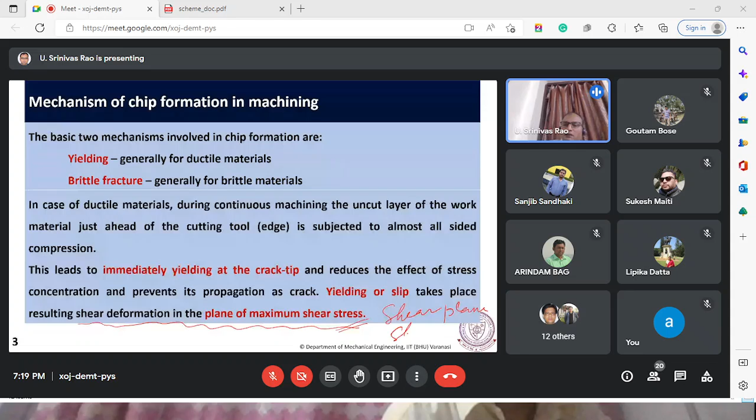Then in case of brittle materials, what happens is material gradually develops a crack which gets initiated before the tool tip, and gradually that crack propagates and it gets separated. This process of swelling, further swelling, and separation goes on repeatedly. In this process, what we get is very small or discontinuous chips. This is the way brittle materials are machined, and we get the material removed in terms of chip.

Then what is the problem with that? When the discontinuous chips are forming, during breaking there is vibration generated, so it may give rise to very rough surface. Another issue is that because these materials are very hard, we always need still harder tool materials.

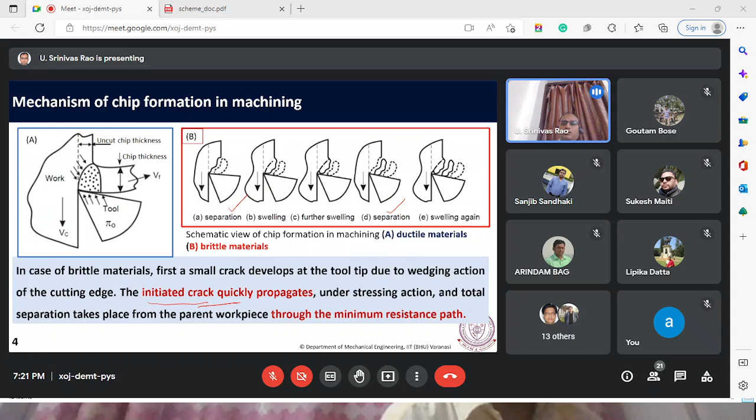Now, to what extent can we go for harder tool materials? Affording tool materials to satisfy the requirements of cutting brittle materials means we need tool materials which can withstand high cutting temperature, so we need very high hot hardness and hot strength. Apart from this, it should withstand thermal shocks, and there should not be any built-up edge formation when we go for lower velocities to control cutting temperature, so as to restrict rapid tool wear and reduced tool life.

We need to go for high-end cutting tools, maybe CBN or diamond, which is not always economically viable. So we cannot go for these cutting tools in every case. In some cases, ceramics themselves are very hard—their hardness is comparable to normal cutting tools like tungsten carbide, cobalt, cemented carbides—so with that kind of hardness, we may not afford to cut at all using these traditional processes.

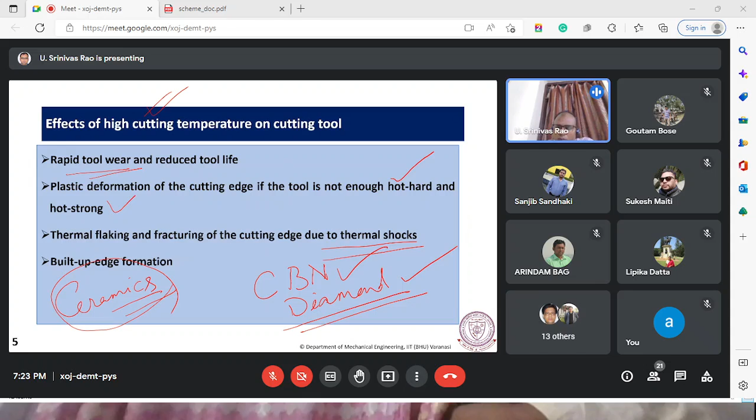So normally what is done is we have to choose certain cutting tools and a certain cutting process to achieve material removal successfully. Before going into that, another fundamental aspect I want to share—these are all textbook material, not very new, but compiled long back. So what are the possible ways of improving machinability of work materials?

One way is to change favorably the composition, microstructure, and mechanical properties using certain additives or heat treatment. Normally through heat treatment such as annealing, we try to soften the material so the cutting process can be easier, or we add certain additives on the surface of the material so material removal becomes easier.

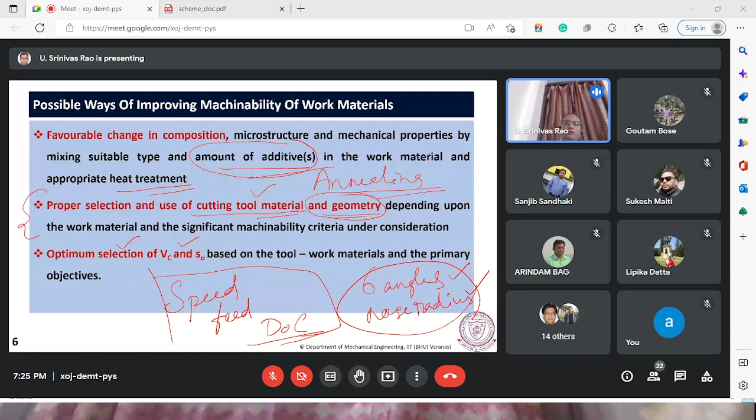Another way is proper selection and use of cutting tool material and cutting tool geometry—this is a vast area of machinability research where we optimize speed and depth of cut for any combination of workpiece and tool. Cutting tool geometry is specified by 6 angles and nose radius, and all these parameters affect cutting in different ways. So optimizing these angles, nose radius, speed, feed, and depth of cut is one way to optimize the cutting process.

Then another method is the appropriate application of cutting fluid—choosing the right cutting fluid. For example, in machining titanium with cemented carbide, if you go for dry cutting, the tool gets worn out very quickly, but if you use certain cutting fluids, the tool life gets increased.

So this is another way. When we say application of cutting fluid, that includes choosing a cutting fluid, then applying that in different ways suitably. There are many ways devised for application of cutting fluid, and these things are continuously getting improved, with proper selection and application of some special techniques. This is an ever increasing methodology.

This gives innovative ideas. Some are already established, in the sense we can use these things in different ways for different applications, like dynamic machining, where we use certain kinds of vibrations. We can vary the wavelengths and frequencies of the vibrations applied, whether continuous or pulsing, and some changes can be implemented there.

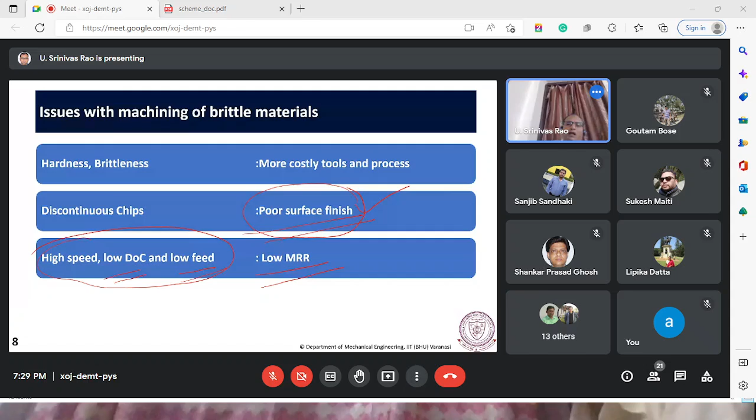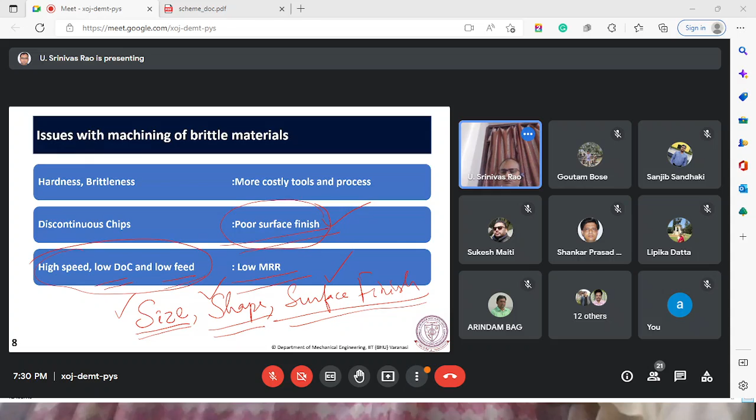And when we specify what the component requires, it's size accuracy, shape accuracy in terms of geometrical accuracies, size accuracies in terms of stringent dimensional tolerances, then surface finish. These things are to be achieved; only then will the utility or economic value of the component be high. So that gives the motivation for our work.

Now, traditionally, what are the methods followed for machining brittle materials? Normally, abrasive methods are taken. In abrasive methods, we have grinding, honing, lapping, and polishing—these are loose abrasive processes.

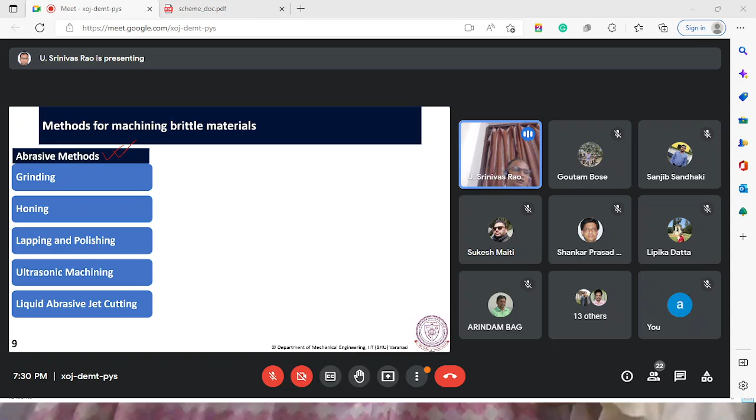Then ultrasonic machining, but this is basically vibration assisted machining. Then liquid abrasive jet cutting. Then non-abrasive methods, like unconventional machining processes: electrical discharge machining, laser beam cutting, electron beam and ion beam cutting, friction cutting, microwave cutting.

Then this is what our interest is: ductile regime machining. This is a non-abrasive method, similar to normal machining or macro machining—only with controlled depth of cut and feed speed. Then there are combined abrasive and non-abrasive machining processes, which we can call hybrid machining processes. This list is not exhaustive; in fact all these lists are not exhaustive, and you can add many more processes to this.

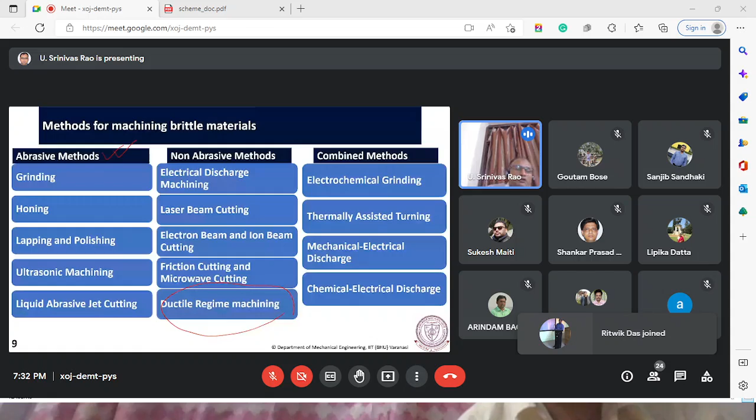Now, what are the basic problems that lead us to this? In all these processes listed here—grinding, honing, etc., whether edge grinding, finishing, lapping, or polishing—we encounter some micro cracks and subsurface damage in the final output. Though we remove material, the component obtained will have some micro cracks and subsurface damages, which is not very desirable. So there is always a need to avoid this.

This gives an alternative method. Ductile regime machining is an alternative method for machining brittle materials to obtain—so we have to avoid that—crack free surface finish, through a ductile and plastic material removal process. If we go for brittle material machining in the ductile regime, we may end up with crack-free surface finish, which is the desirable output.

Crack-free, high-quality surfaces—we should develop some. Till now, these ceramics, it is a challenge to give shape to them.

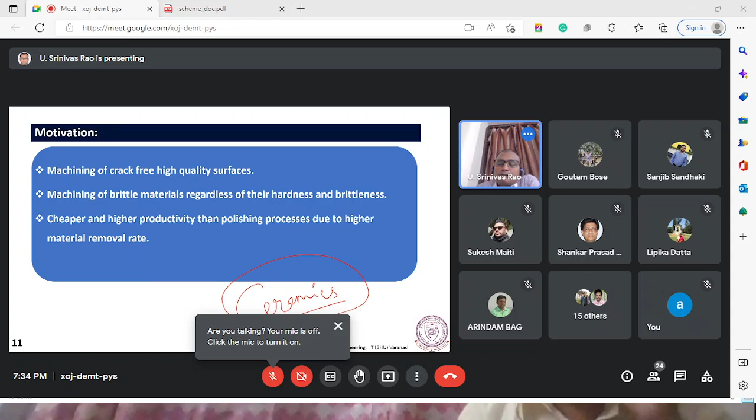So, machining brittle materials regardless of their hardness and brittleness—this is some feasibility or enhancement of feasibility. Then another economic aspect: cheaper and higher productivity than polishing processes.

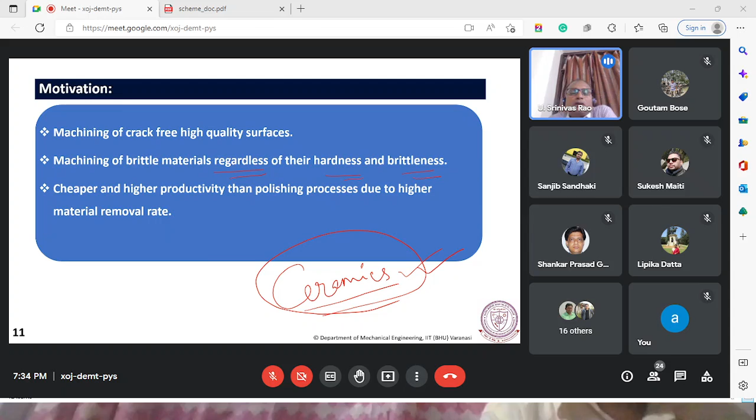Whenever bulk machining is not possible, what we go for is grinding or some polishing process through loose abrasives to try to remove certain material. In these cases, the material removal rates are very small. So we need to increase the material removal rates and achieve higher productivity, thereby ending up with cheaper products.

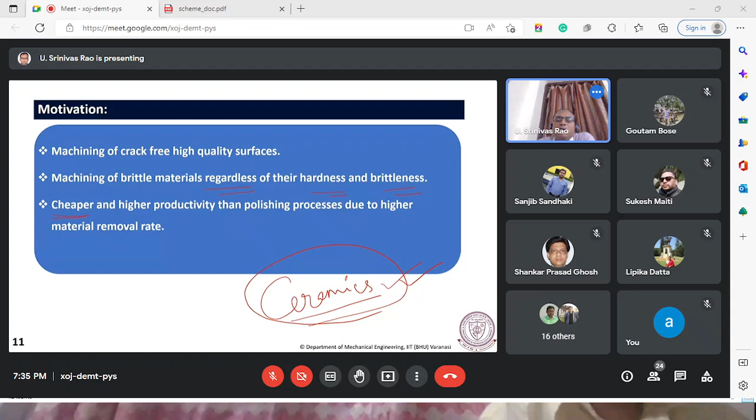How is this possible for a brittle material? The main reason it is feasible is that all brittle materials have a small deformation during machining. This can be highlighted through the stress strain curve. Brittle material is characterized by sudden failure without having deformation, but that does not mean zero deformation. There is a small element of deformation present.

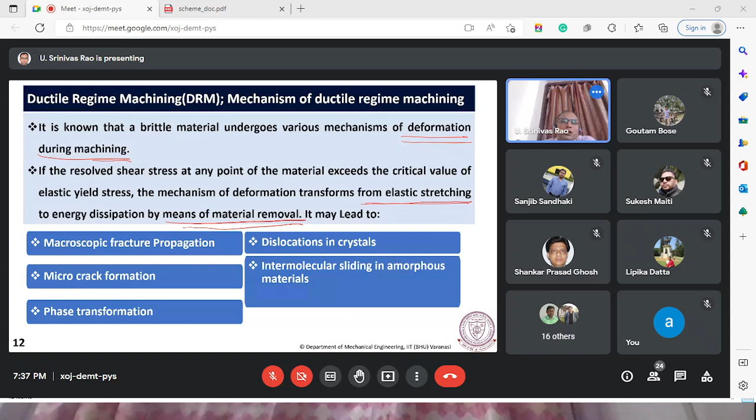If the resolved shear stress at any point of the material exceeds the critical value of elastic yield stress, the mechanism of deformation transforms from elastic stretching to energy dissipation by means of material removal. Through this, we can achieve macroscopic fracture propagation, micro crack formation, phase transformation, dislocations in crystals, and intermolecular sliding in amorphous materials. These give a window of opportunity to have some deformation in machining that we can explore.

Regarding energy dissipated in machining of brittle materials: in the total energy consumed to produce that small chip, a small fraction of energy is dissipated or used in ductile regime machining due to plastic deformation, while the bulk of the material is removed through brittle fracture. Both are happening—one taking place along the slip plane, and another along the cleavage plane through propagation of the microcrack.

This gives further information related to the size effect. Size effect is the non-linear increase in energy consumption when we reduce the depth of cut. So how does that affect this process?

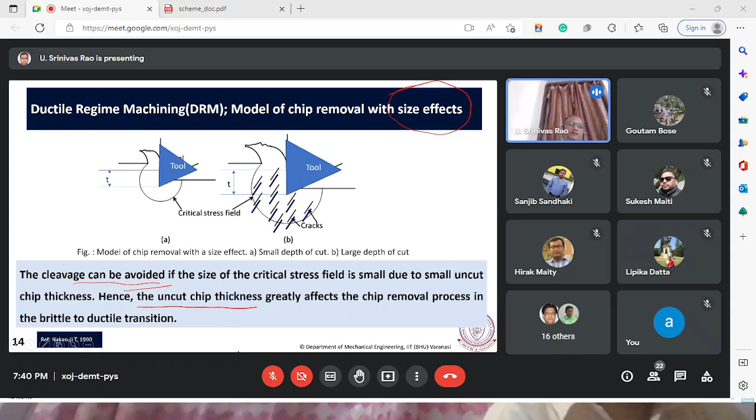In slot milling, the chip thickness is not uniform—it varies from 0 to maximum. Whether it's end milling, down milling, or up milling, the chip thickness is not uniform in any of these cases. So when we have non-uniform chip thickness, some part of the uncut chip thickness is less than what is required for material removal. When this condition is satisfied, there will be only rubbing action, and no chip will be removed.

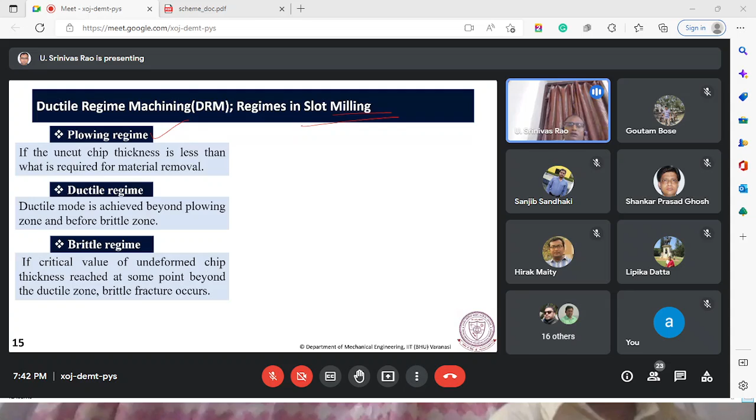Then in this next zone, the chip thickness is more than in the plowing zone, but it still only has plastic deformation and shear—that is known as the ductile regime. Further increasing, chip formation takes place through the brittle zone. As we know, in milling there is variation of the chip thickness, and we have all three zones. If we restrict ourselves to the ductile zone only, we can produce a surface without any micro cracks.

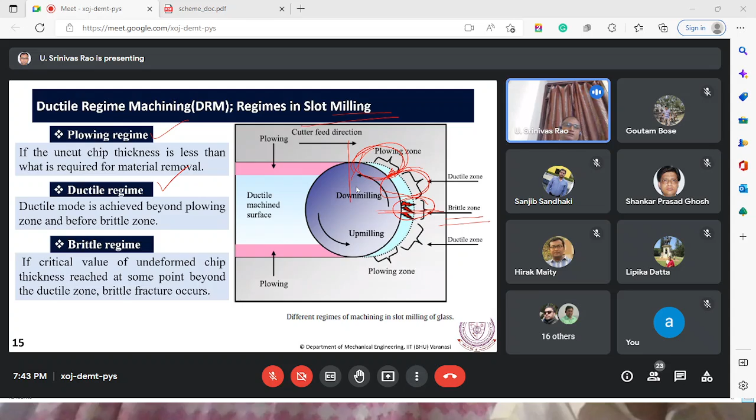This further explains the case of up milling, where chip thickness goes from 0 to maximum. In this zone, no cracks are formed; in this other zone, cracks are formed. If the radial depth of cut is further increased, the machined surface will also have cracks. So we need to keep the uncut chip thickness below some critical value, otherwise brittle fracture will happen.

So if we can keep the brittle fracture point far from the level of final machine surface, then with low feed rate, no brittle fracture will occur and we can avoid these micro cracks on the surface. Surface gets formed, but it is having micro cracks on the surface.

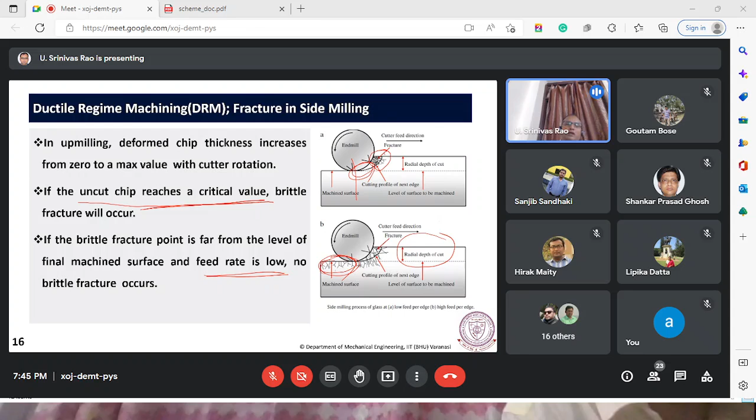So some literature gives inputs to this. Plastic flow happens as a more energetically favorable material removal process than fracture at lower depths of cut. If the size of the critical stress field is small due to the small uncut chip thickness, the cleavage can be prevented. So in all these cases, the highlighted point is that we need to control the critical stress field through small uncut chip thickness.

Another literature reference also gives the same image. Chip formation takes place in a ductile manner if the depth of cut is small enough. So these things can be checked through scratch tests and indentation tests, like we normally do indentation for finding out hardness. That gives an idea about up to what point the micro cracks are not generated.

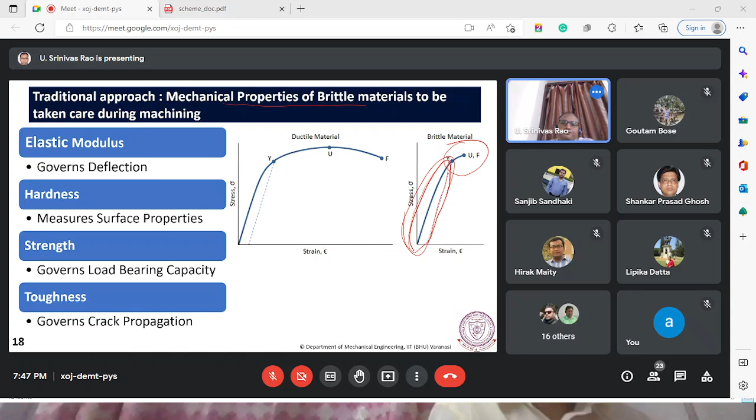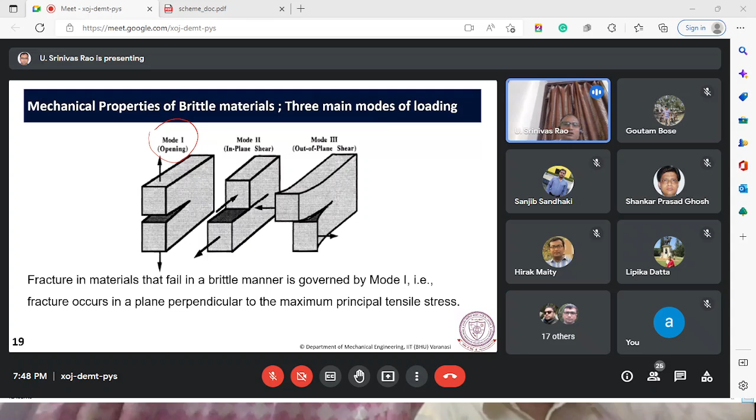Now, gradually, what we need to obtain, the final aim, is to obtain a crack free surface. For that, we need to check when that crack forms. The hardness indentation is the starting point. So when we have different levels of indentation, normally there is a plastic zone. When you further increase, radial cracks are there.

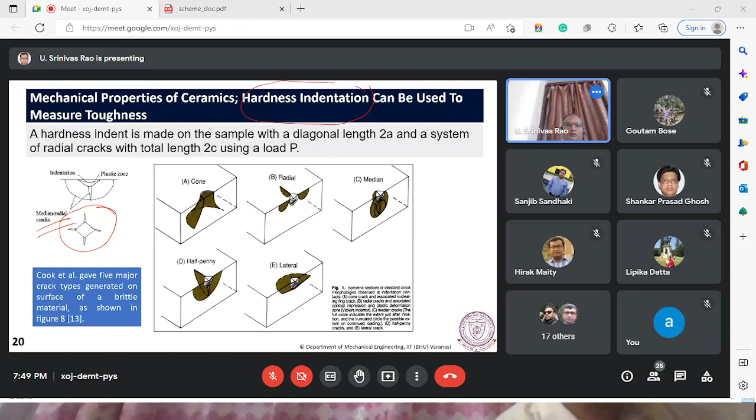Through this experimentation, there is a model developed now for critical depth of cut. Normally indentation is done for hardness tests, so based on the shape of the indenter, we have the hardness value calculated.

That can be used to find out the critical stress, and fracture toughness we find, which has a zeta value given. These are all empirically obtained, and from this there is a calculation for the model developed for critical depth of cut, which is related in terms of elasticity of the material, hardness of the material, and fracture toughness of the material.

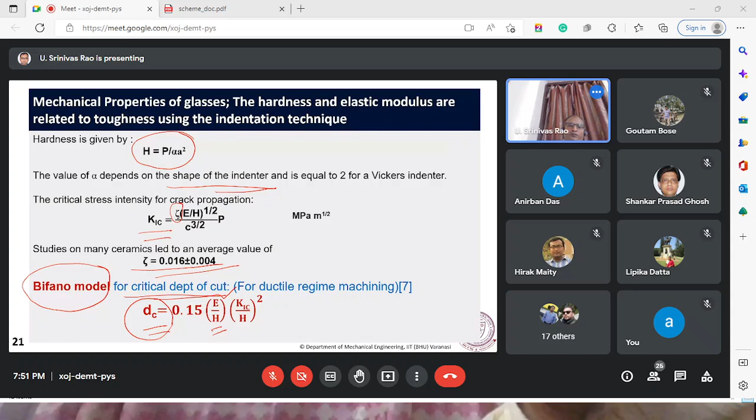So through elasticity, that is Young's elastic modulus, hardness, and fracture toughness, these are all material properties. Through these material properties, we can arrive at the critical depth of cut. Now, this critical depth of cut is a very small value.

These things have been observed and checked in different processes. One such process is ductile regime grinding. In this, based on the machine configuration, stiffness, and other details, the critical value, how small it is, has to be obtained. We are not going into the details of these investigations, but they are available in literature.

So the basic hypothesis in whatever we have discussed is that regardless of the hardness or brittleness, there is a small element of transition between brittle machining regime to ductile regime. If we can control that, if we make the grinding in-feed rate small enough, then we can achieve ductile regime machining, and the main advantage is that the percentage of surface fracture obtained is very less.

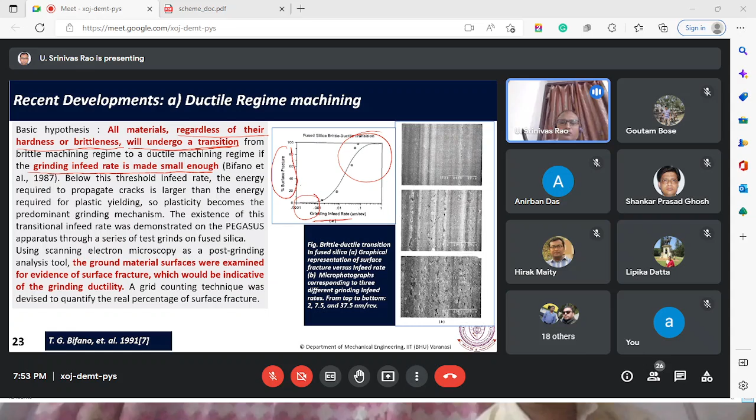Similarly, some other investigations have been done. In all these cases, the calculated indentation depth is related to the fracture propagation criteria, and through that the critical depth is obtained. This again, he has done pioneering work in this area. Way back in 1991, he investigated a lot into ductile regime machining and developed that model, famously known as the Bifano model, which gives an estimation of critical depth of cut.

So we have these parameters. Along with that, some constants are required.

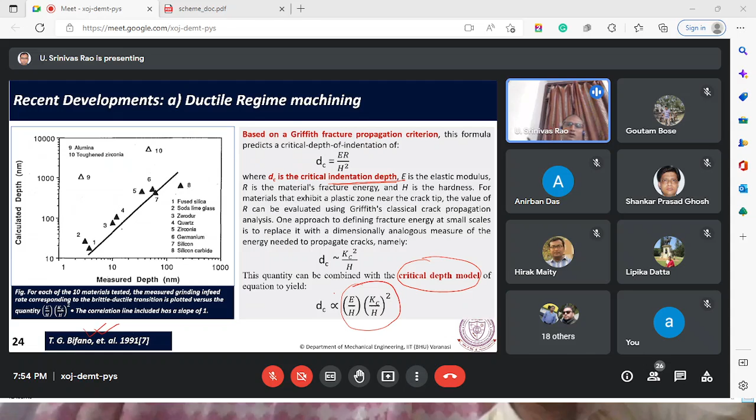From this work, what we have obtained is there is a possibility of ductile regime machining, and to achieve that, what we require is to know the critical depth of cut. If we can go for machining at critical grinding in-feed rate below that, then we will achieve ductile regime machining. So first knowing this is important, then keeping the depth of cut below this.

Now the issue is this value is very small. If the critical depth of cut is very small, then naturally the MRR will be small. So the next thought is how can we increase it, how to determine it experimentally. These two are basic challenges. Then, can it be increased further? This is the big question.

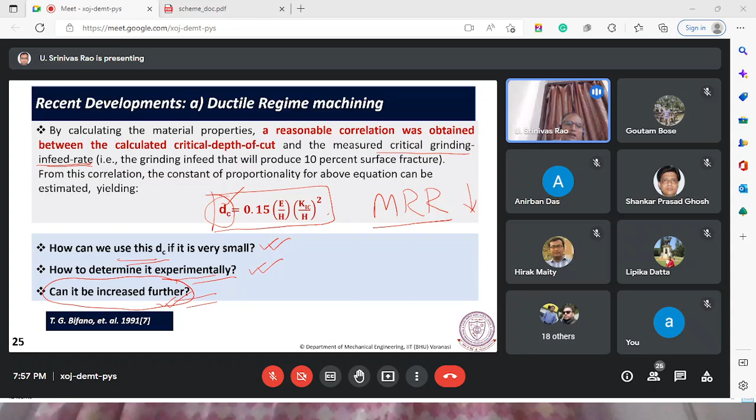In fact, we at IIT BHU had a small attempt to do this. We used this knowledge and tried to increase it further. The basic idea is not very big: we know that when we increase the temperature of any material, its ductile behavior range increases. So we wanted to investigate into that, and it has been done by other researchers in different ways.

To determine the value of this critical depth, we have used scratch tests of brittle materials as well as indentation tests. In the scratch test, the width and depth of the scratch give an estimation of the critical depth, or in a way give the threshold value of brittle-ductile transition. So these nano scratch techniques are important.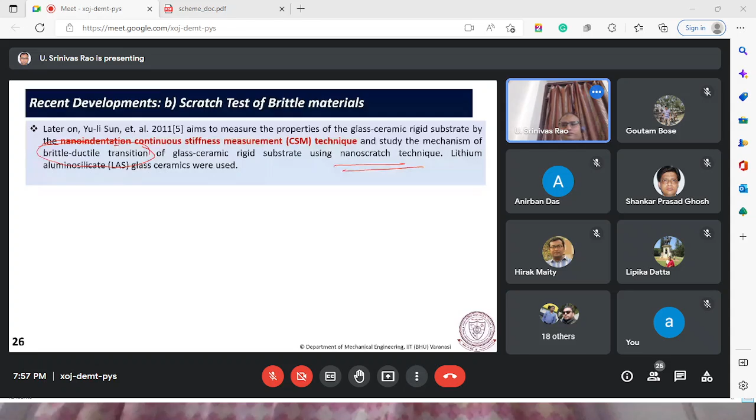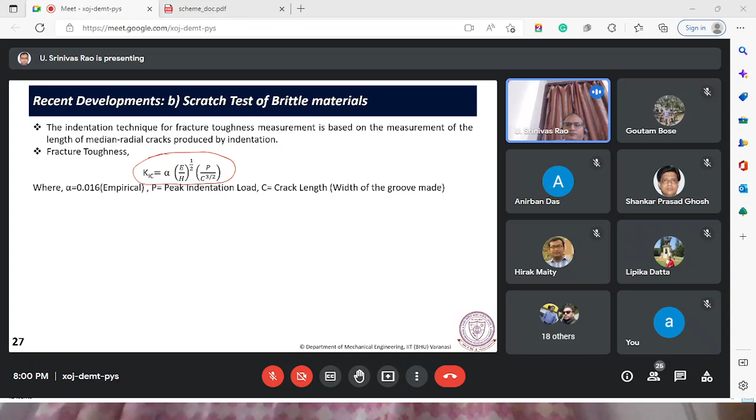Here you can see, when we have a gradual increasing load, this is what the test shows in detail. It shows a scratch test in which the normal load is gradually increased. Between 0 to 26, you can see the surface is totally smooth, no scratch is shown. Then scratch starts forming, but there are no lateral cracks. Then in stage 3, you have a lot of lateral cracks.

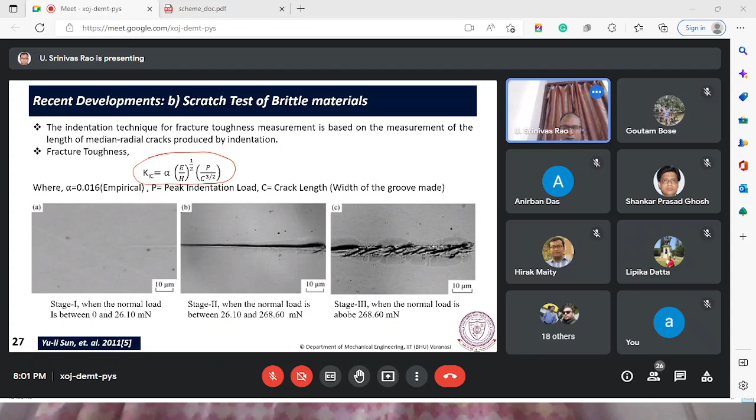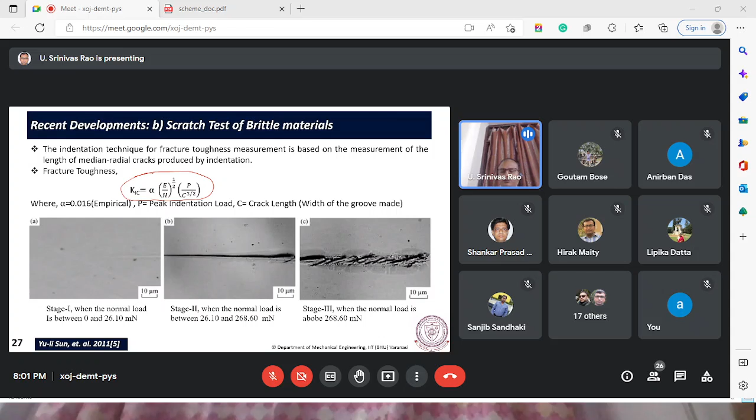From this, we can find out the transition phase where the formation of lateral cracks marks the brittle-ductile transition. Initially, it is ductile mode, then when the load is further increased, it goes to brittle. So from there, we find out the critical depth information and the fracture toughness at that load.

And then when the ductile and brittle transition happens, a lot of cracks occur, and that makes the scratch depth also fluctuate.

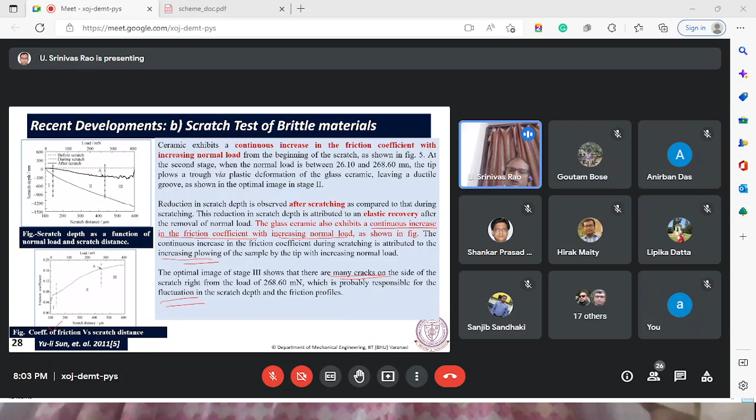So through all this experimentation for different materials, this critical indentation depth, DC, is found. It's being done continuously. From those things, as already mentioned, Bifano formulated this, and in that formula, the constant is material specific, so it has to be obtained through experimentation only. The experimentation may be grinding test, indentation test, or scratch test. These are different tests to get the critical depth of cut.

I think we will continue without a break, or do you want a break? It's up to you whether you want to continue. If you take a break, the flow will be broken, so we can continue, no issue.

So the basic thing we have seen till now is that we can go for indentation test, scratch test, or some machining test, or controlled machining such as grinding, which can be taken as a test. From there we need to find out this empirical constant of the formula, and then the next question is how to increase that.

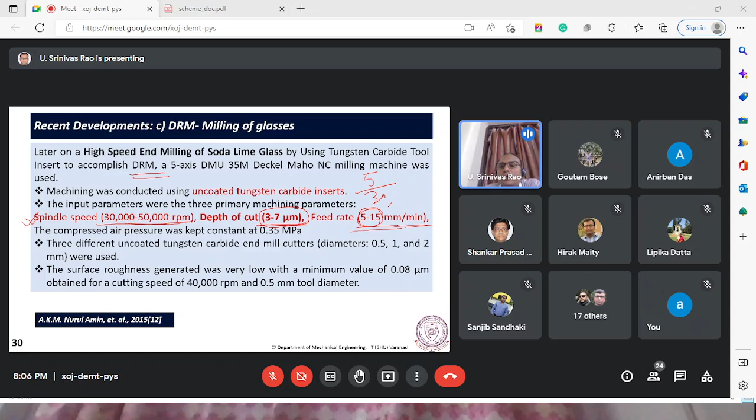The feed rate is 5 to 15 per minute. This looks like a big value, but if you take 5 by 30,000, that gives the feed per revolution, which is almost 10 to the power minus 4, a small value -- about 0.1 micrometer per revolution. These values give an idea about the challenge: we are dealing with very small depth of cut and very small feed, which actually motivates increasing it.

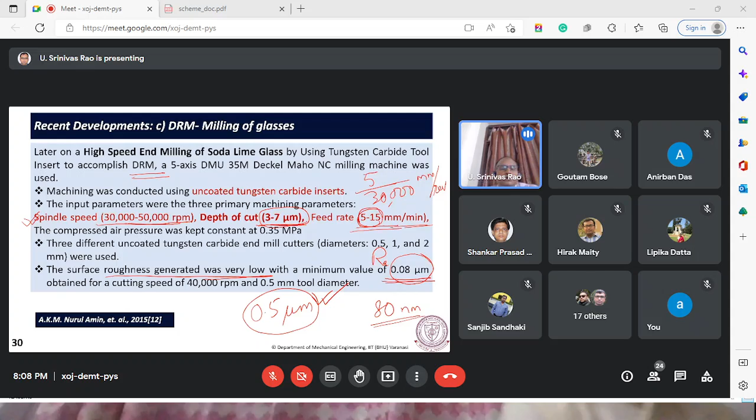However, with this approach, the surface roughness generated is very low, with a minimum of 0.08 micrometer RA, which is basically 80 nanometer. In normal precision machining, such as turning, around 0.5 to 1 micrometer is considered very good roughness for macro machining, so this is smoother than that -- the glass surface generated is quite smooth. But with these parameters of depth of cut and feed, the material removal rate will be very low.

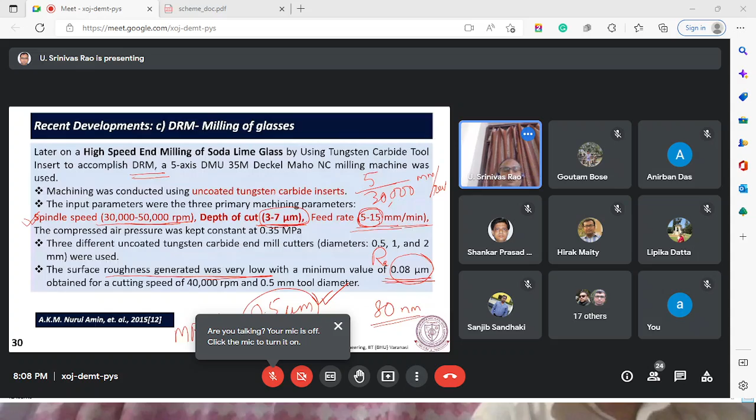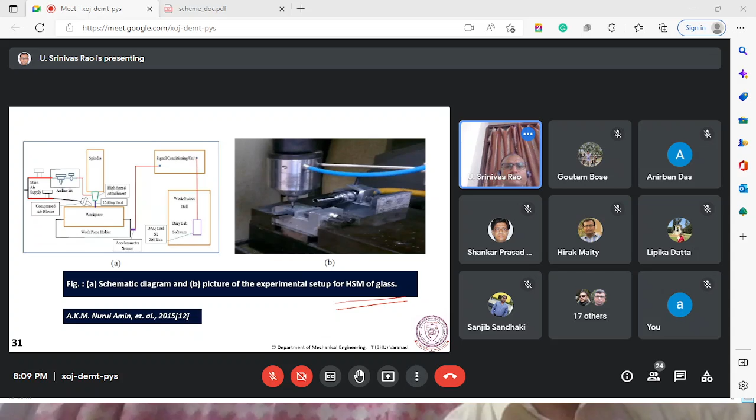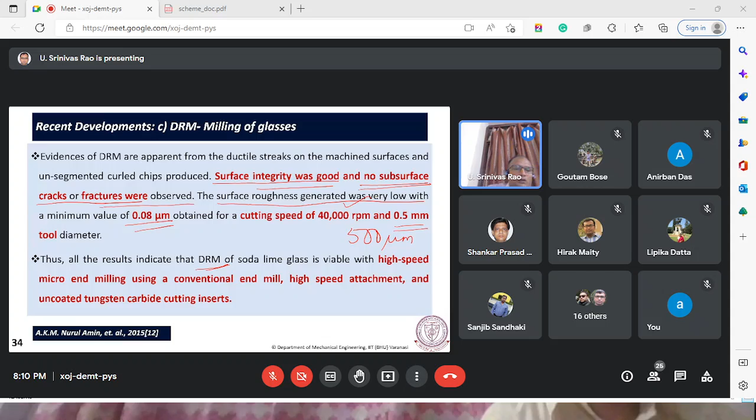We'll skip some part of this and go to other details -- these are some details of the experimentation showing how they arrived at the conclusions. What they achieved is that surface integrity was good, with no subsurface cracks or fractures, and surface roughness generated was very low, minimum 0.08 micrometer, at this cutting speed with a 0.5 millimeter, that is 500 micrometer, tool diameter end mill. So it is possible to cut soda lime glass in ductile regime machining at these conditions with normal uncoated tungsten carbide cutting inserts. This is the conclusion of this experimentation.

There is a motivation to increase this critical depth of cut. In that direction, experimentation has been done on temperature versus hardness of the glass.

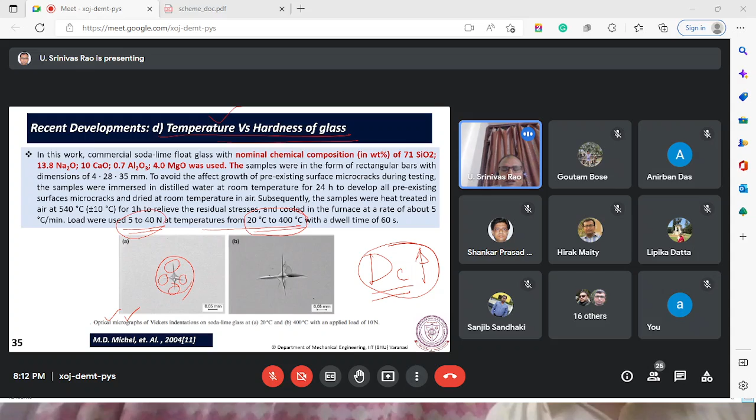The hardness is checked using different loads at different temperatures. It isn't very complex: you increase the load and the temperature with these combinations, and check when the crack forms. After indentation, we check through optical micrographs whether these median cracks are formed or not, and at what load and temperature they are not formed. That gives information about the critical depth of cut.

When you increase the load, crack length increases, which is of course quite obvious. And with increasing temperature, at different loads, the crack length growth is more.

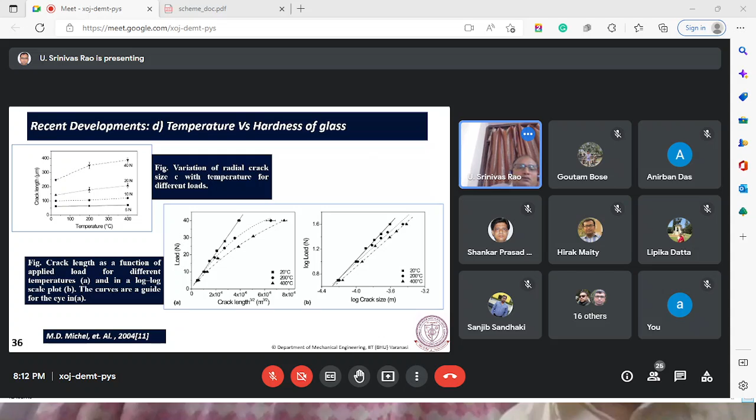From these extensive experiments, the conclusions are of course obvious, but we need to find out the nature of the change, at what rate the hardness decreases as temperature increases. Through these Vickers indentation experiments, it has been observed that hardness decreases as temperature increases, and the radial crack length measured at the surface increased with temperature.

These experiments give an idea that if we can increase the temperature of the specimen, there is a possibility of improvement, because the E by H ratio is important for the depth of cut. In the Bifano model, we have one term which is E by H. So if H reduces, the depth of cut will increase. That is the effort.

At the same time, E should not reduce too much. If H is reducing, E will also reduce to some extent, but both should not reduce at the same rate. So what we should finally end up with is a higher E by H.

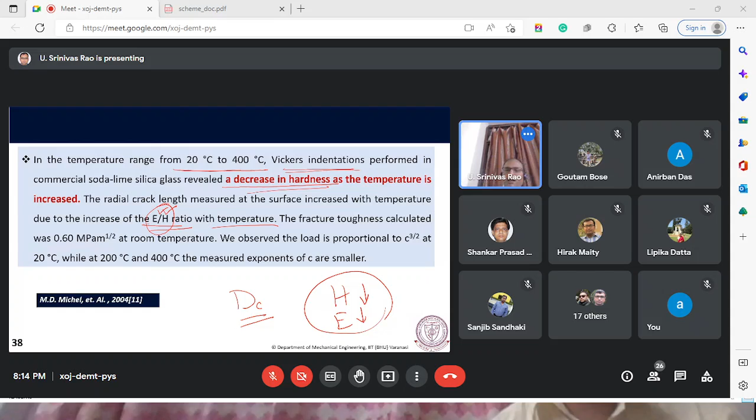With these inputs, people have tried laser assisted machining. This is also a well known domain. To increase material removal rates and improve surface roughness, people have adopted this approach, which can be extended to brittle materials as well, through local heating.

Through this laser heating source, the small area in front of the tool is heated. Because of that reduction in hardness, material removal becomes easier. In this process, we have some heat affected zone, and after machining is over, some heat treatment can be done to improve the material properties.

But there are certain problems with this as well. These are certain characteristics of laser assisted machining: the parameters are laser beam power intensity, spot size, beam distribution, and scanning velocity. Based on this, the localized laser effects matter, and the major effect is thermal stress gradients.

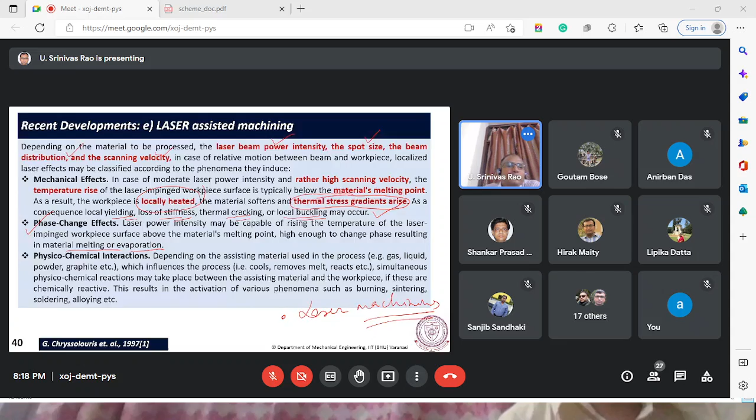Keeping these challenges in mind, these methods increase the process efficiency for materials which are difficult to cut compared to conventional methods. These LAM methods are now established. For materials known as difficult to cut, laser assisted turning, milling, drilling, grinding, etc., have been undertaken.

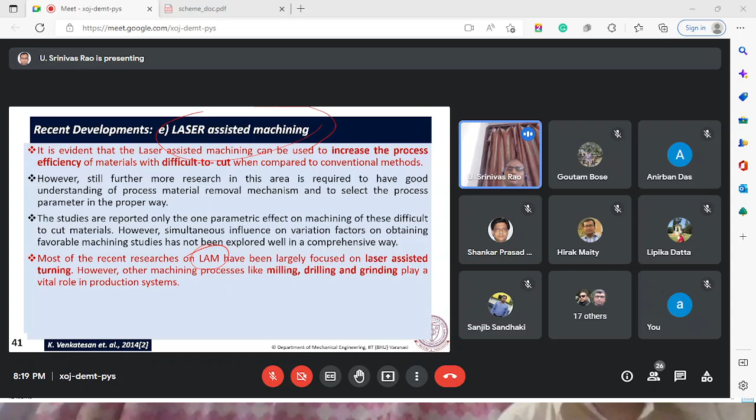However, there are some issues, as we have pointed out. Local heating creates a non-uniform heat affected zone, and then high thermal stresses. This happens if you are using a single point cutting tool, so the area in front of the tool may be heated in a better way.

But with these issues in mind, what we have thought is let us try bulk heating. In case of bulk heating, the total material property, temperature, is getting increased, and the thermal gradient is very less. So when the thermal temperature gradient is less, the thermal stresses will be minimum. This may be suitable for all machining processes.

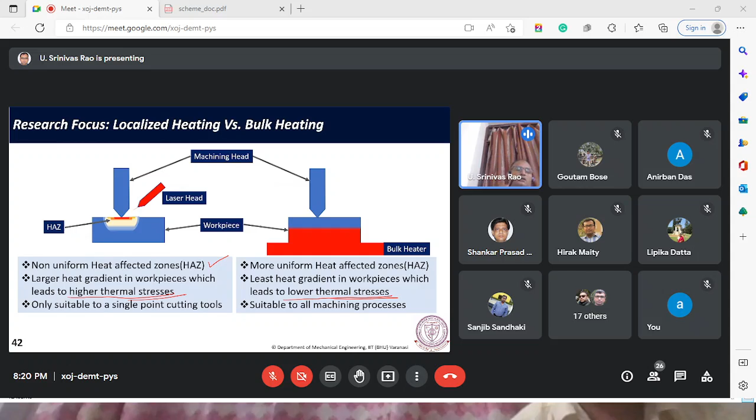So this gives the main motivation, or research interest, that the heating of ceramic samples can lead to better ductility so as to achieve better machinability. This gives some idea about increasing the critical depth of cut. There is a possibility that bulk heating of the samples can be a better option than localized heating by means of laser sources, to reduce the thermal gradients.

With this idea, we need to check the machining work on glasses, which are mostly subjected to grinding and polishing, which are very slow processes. If this machining process is successful, we can go for glass machining instead of grinding and polishing, which is being done nowadays. With that in mind, we have chosen bioglass as the candidate material for some investigations.

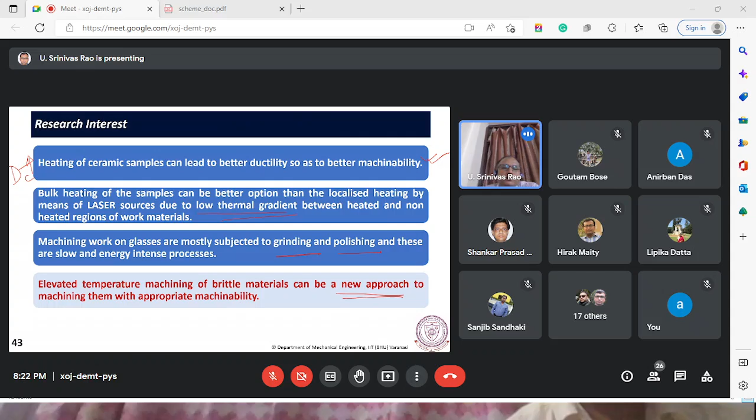So this is a new approach, elevated temperature with bulk heating. Some effort has been put at IIT BHU, where one PhD scholar has worked in this area. Before going into that, some little information about the sample preparation of bioglass.

This indicates the material composition which is taken, and to keep all the specimens of uniform composition, the total material is prepared at once, so it goes through mixing of the powders. Then it is divided into some batch size, kept in an alumina crucible, then charged in a high temperature electric furnace, and held at 1400 degrees centigrade for 2 hours.

After this we obtain the glass, and that molten glass has to be cast into plates, through some molding. So through this, glass specimens have been prepared, which will be used for different experimentation.

So these are some details of the glass formation and how the glass property can be changed through annealing.

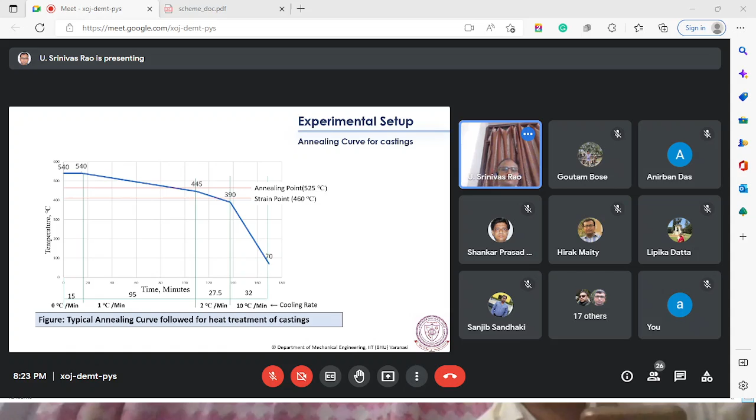As I told, bulk heating and then doing some experiments to obtain the critical depth. So a portable heating setup has been developed, and using that heating setup, it is loaded onto a scratch tester on which the specimen is mounted.

Then the effect of the traction force and scratch speed at different temperatures are checked, and from there we found the brittle ductile transition and critical depth of cut. Further, optimization of that we have done. I will give some idea about these things.

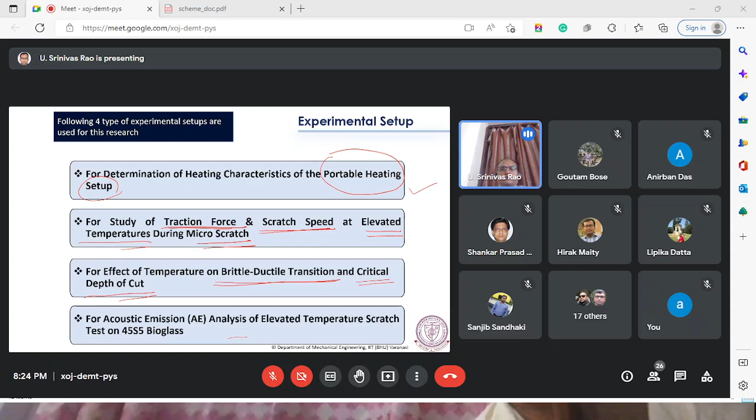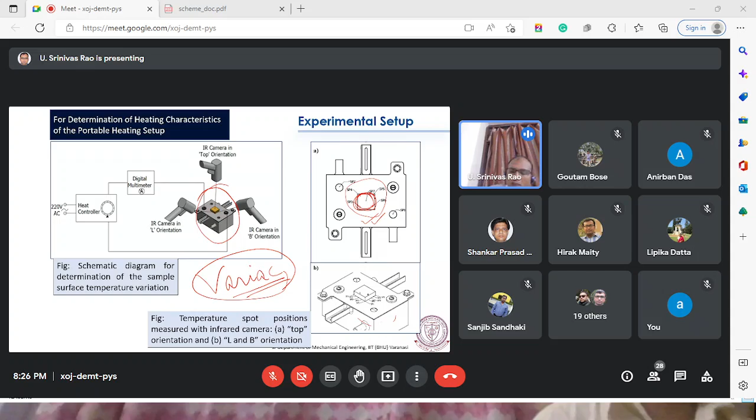...there is a water jacket. This is a double walled housing, so in that there is a water jacket, water can be flown in that to maintain the temperature constant. Then to obtain different temperatures, the heating rate is controlled through using a variac, so we can control the power supply through the variac, and from there we obtain the desired settings. These things are carefully designed, and the characteristics of the heating elements are obtained.

Then that is mounted on this, and the scratch testing is done, and from there we get, through the load sensor, the load variation. In fact we take ramp loading.

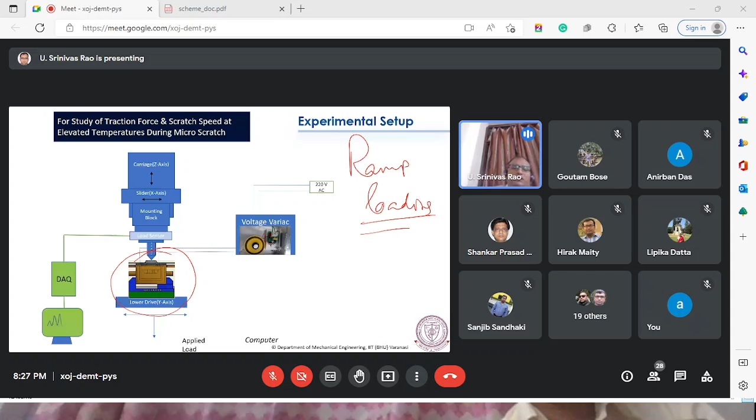Basically we gradually increase the loading, and we check the characteristics through the acoustic emission signal. Acoustic emission is basically the vibrations generated through elastic emission whenever some material is undergoing deformation, it emits elastic waves, which are captured through this acoustic emission sensor.

So in this specimen, some coolant is flown. Basically, water is flown through that to keep the temperature uniform.

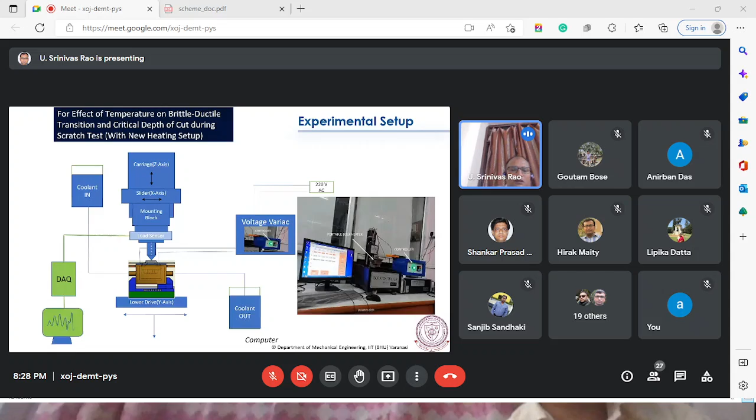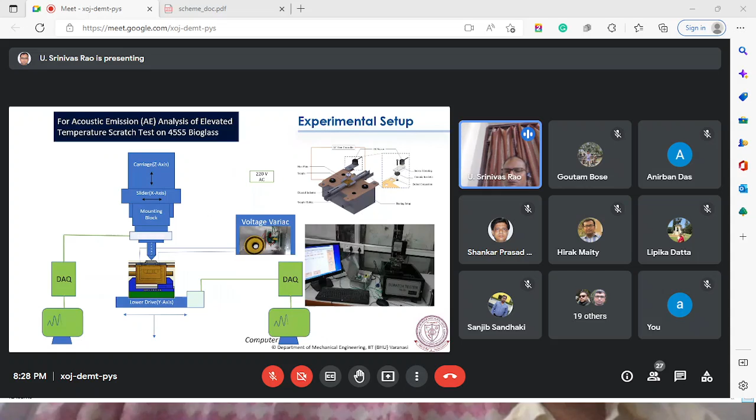The different experimental conditions are shown here, so we need not go into it. Now some details about the heating setup.

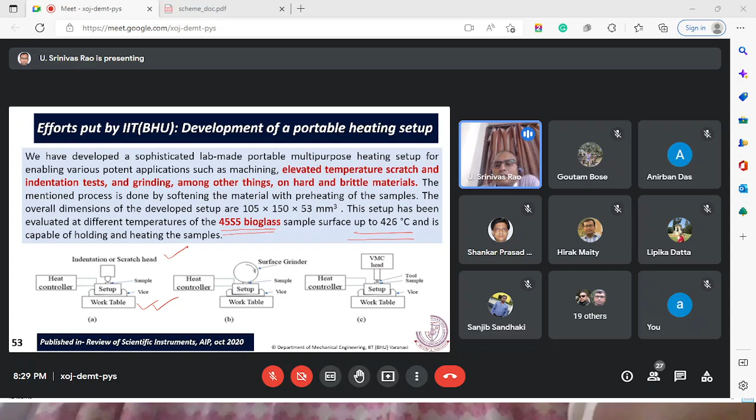That is developed to increase the temperature up to 426 degrees centigrade. The heating setup can hold the specimen, and at the same time it can heat, and it can be used with any machine. Any machine means you can load it onto any work table, and you can use it either in indentation, scratch, or some VMC surface grinder. So it is multi-purpose.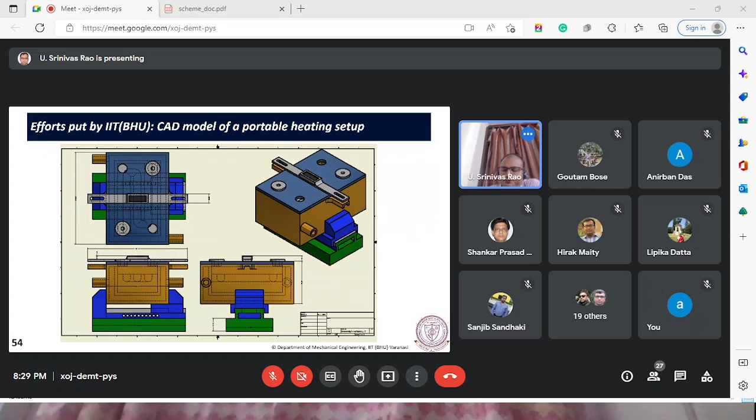Some elements and details of that heating setup are shown here. This slide gives you the details. This is the top plate, and here the heating element is put, and this housing is a double walled housing, having some thickness, so the coolant can enter one side and come out the other, and this is the vise which is holding this.

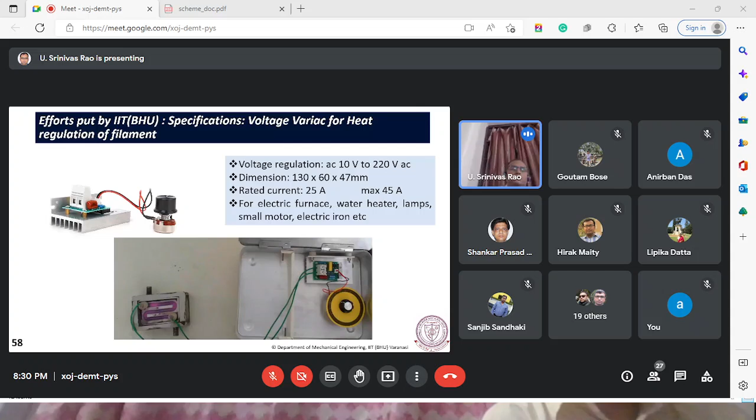And we are having voltage regulation through this variac. So this is a small device, but carefully designed and developed to satisfy the characteristics. If somebody looks at it very superficially, it gives the impression that it is not putting out any heating element.

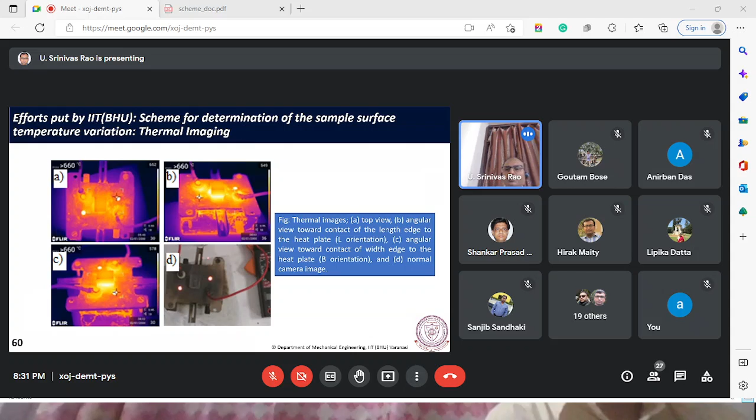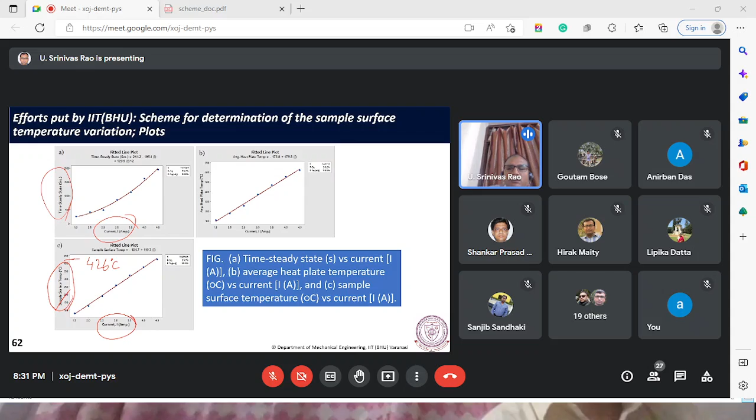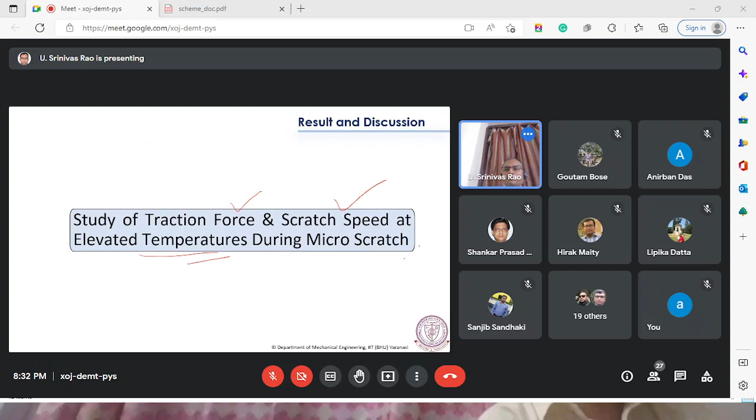So that is about the heating setup, and using that heating setup, the influence of traction force and scratch speed is studied through micro scratch testing.

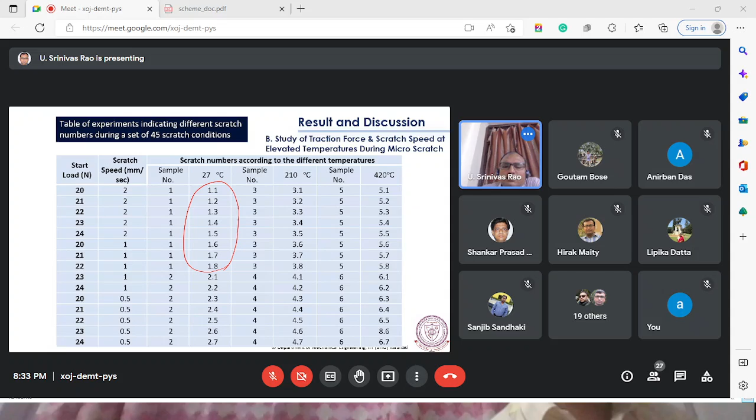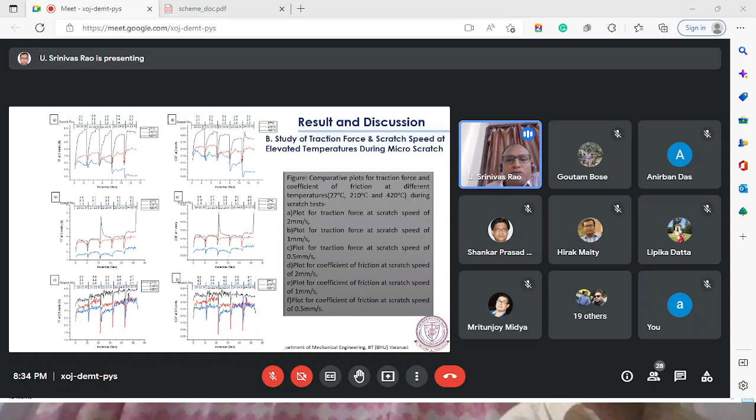Then in some cases, at different loads and different temperatures, what is the scratch depth - those things are studied, and how the force variation takes place at different traction force and at different instances. So we try to evaluate those things.

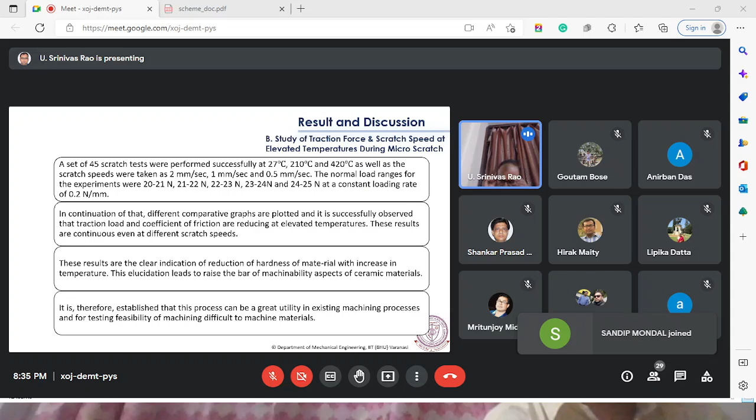So through all these, actually we can arrive at this - at different loads, at different temperatures, different scratch speeds, we conducted the experiments, and then through that I will show you one more graph.

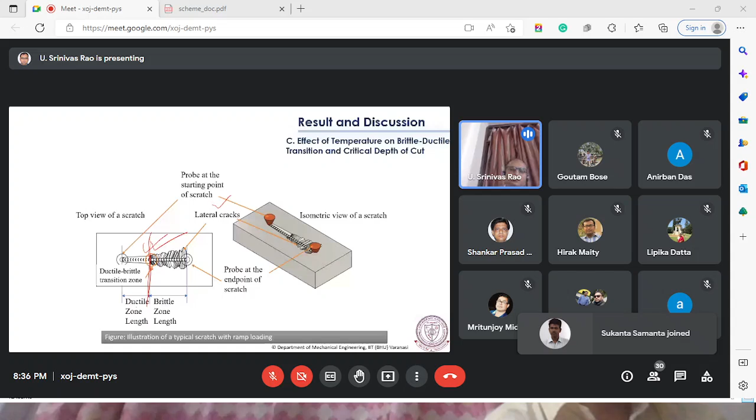So this point is demarcated - this gives the point of critical depth. And how that critical depth is increasing when we have elevated temperature - that was the main point of study, and that is how it is obtained at different places.

The width is actually evaluated along this section, and from there the depth is obtained. So at different cracks, the same thing is repeated for different conditions, and for every condition the critical depth is found, which gives an idea of the critical depth with reference to the temperature.

And using this, with temperature we know that the hardness and elasticity of the material changes. So there was an effort to highlight that and again to model or modify the Bifano model through some empirical constants.

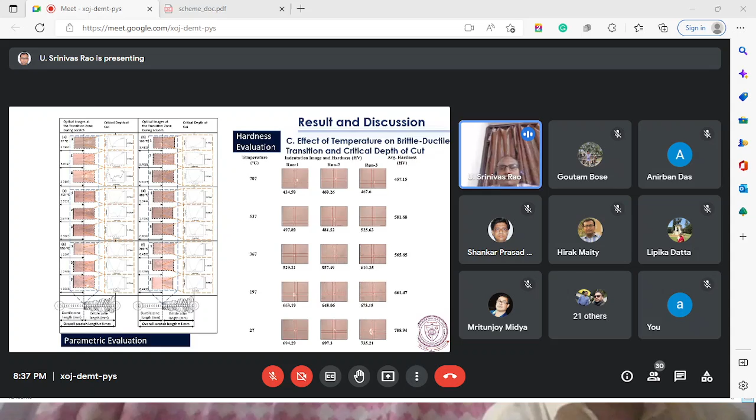Those things I don't want to share further, but...

So this is how the small idea of bulk heating has been implemented, and there is an effort to increase the machinability of brittle materials. Increase the machinability in the sense to increase MRR. The aim is to increase MRR without lateral cracks. So this is the aim, and if this can be achieved, then routinely brittle materials can be machined.

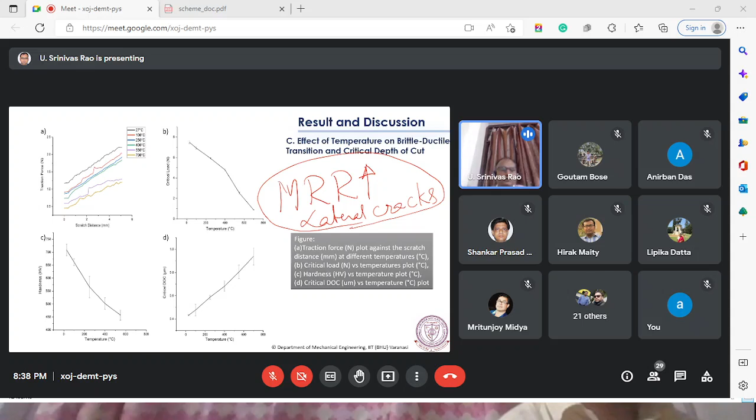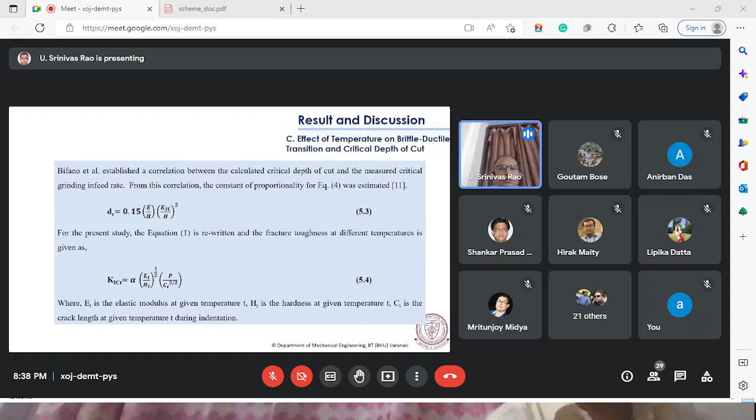Please understand that now they are not routinely machined. At best, some grinding is done for fabrication work. So there are some more details, but I would like to conclude my talk here. If any questions are there, I will gladly take them and try to answer the queries. Thank you very much for patient hearing.

Yes, it was a wonderful presentation on conventional machining. So nowadays, with the importance of non-conventional machining, conventional machining has been kept in the sideline. But still, I believe that conventional machining plays a significant role in mass production systems till now. MRR matters actually, and economic feasibility matters. However, we go for non-traditional machining and additive manufacturing, but conventional machining in the CNC mode is still predominating the entire industry market. So this work is really an outstanding example for researchers who can venture out in the conventional machining part.

Now, one query, if anybody is not asking, I'll put it this way. In high speed machining, you said it's more than 50,000 RPM, so what about the cooling part? Actually, the RPM is 50,000, but the actual cutting velocity in terms of peripheral velocity will be just 50 or 60 meters per minute, because the cutting tool diameter is just 500 micrometers, 0.5 millimetre. So if we take pi-d-n by 60 to find out the meters per minute, it's not a very high value. That is one aspect.